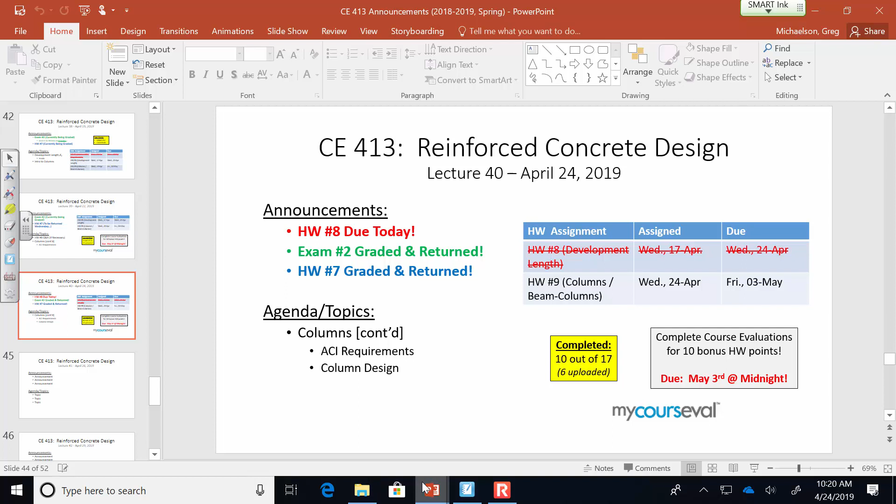Last time we were looking at this particular example. We looked at it, and I don't think the core component was all that difficult: 0.85 Fc prime times the area of the concrete, Fy times the area of the steel, and throw two adjustment factors on there—one's our phi value, and one's the alpha for accidental eccentricity. What was a bit nitpicky about that problem was the details, the little ACI checks we have to do, but in the end I don't think it was terribly difficult, just time consuming. That was for a square or tied column.

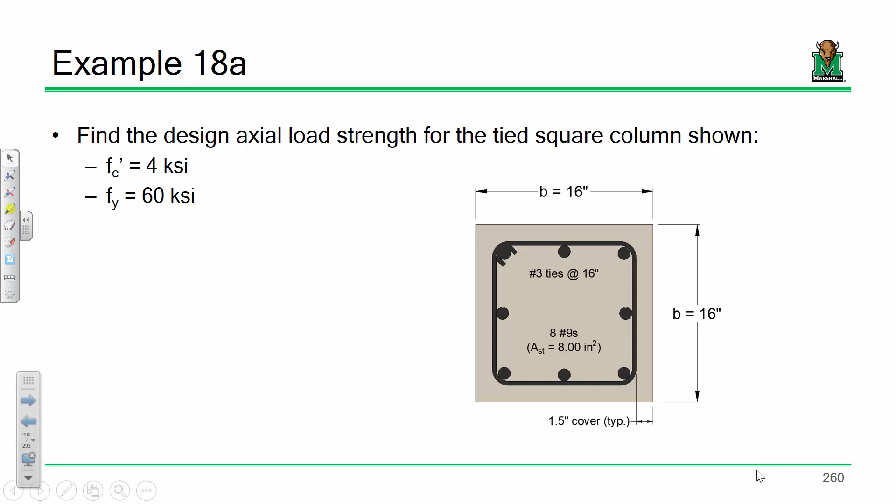Now let's look at spirally reinforced columns. We defined these limits pretty rigorously last time, and I want to review them to make sure everybody remembers. A spirally reinforced column behaves differently because those spirals act like a pressure vessel containing the core of the column. Once you load the column, the exterior concrete falls off, but inside, that spiral reinforcement holds everything together and confines it, so you can eke out a bit more improved behavior from the column.

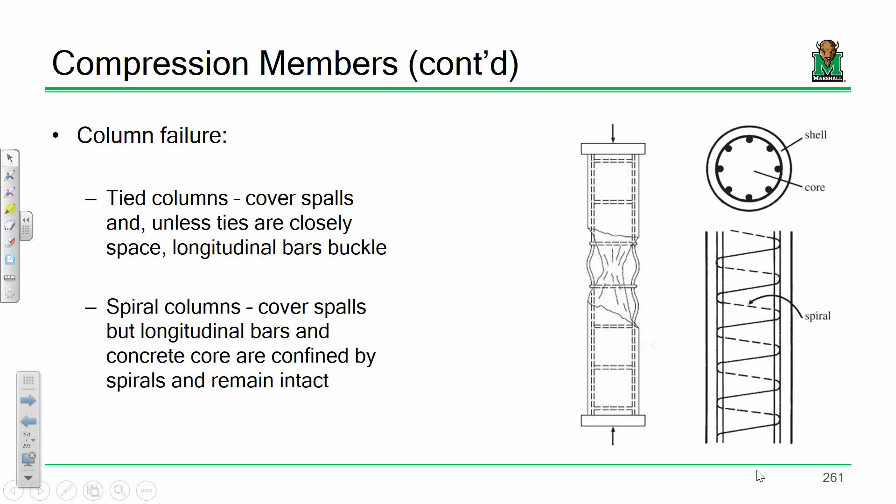Now, in order to do that, you've got to provide a lot of spiral reinforcement, because you're trying to ensure that the spiral reinforcement can hold up 0.85 FC prime times the area of that core.

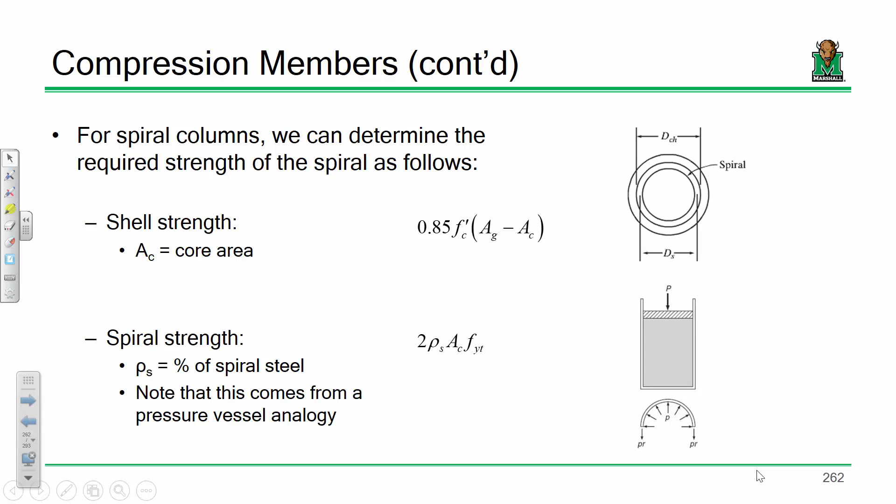That reinforcement needs to meet the required ratio, assuming this acts as a pressure vessel. So we solve for that theoretically, and we get a value that's 0.425 times the limit of those two expressions. What ACI says is, let's just round it up a little bit to 0.45 times those quantities.

Again, really straightforward stuff. Now, that box, keep in mind, that's the limit. That's the minimum amount of spiral reinforcement that we have to provide. This is how much we actually are providing.

So remember, a reinforcement ratio is just the volume of the spiral divided by the volume of the concrete. We're used to doing area of steel divided by area of concrete, but it's a little 3D here because we're talking about the steel going this way.

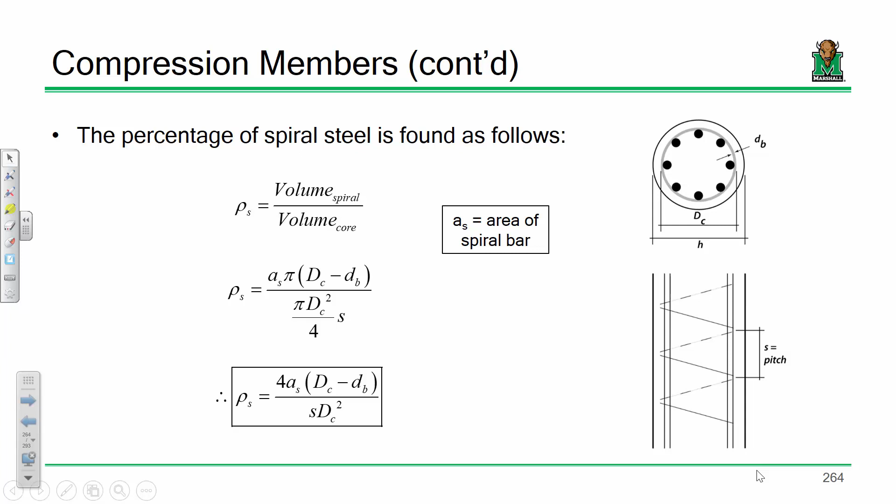It's wrapping around the column and going up, kind of like a big spring. So we take the volume of the steel as just the area of the bar times a single revolution, and then the volume of that concrete as pi d squared over 4 times the height as that rebar goes up one pitch. Just divide the two and do a little algebra to simplify it, and that's the amount of steel we're actually providing.

So that's how much we're providing. That needs to be greater than or equal to our ACI limit, and then you're good.

Sound good? All right, let's go through a pretty straightforward basic example on the analysis of a circular column. So I have a column that's 4 KSI concrete, 60 KSI steel. We have, I believe, 7 bars that are spaced equally around the column.

That's another thing about circular columns, is that you can use like 7 bars and it's not that big of a deal. On a square column, it'd be kind of weird to use 7 bars. You probably want to keep it symmetric and even, but that's no big deal for a circular column.

So we have 1.5 inch cover. It's a 15-inch diameter column. We have a number 3 spiral going up the column pitched at 2 inches. Now we're going to determine the design axial load strength for the column, and we're also going to determine whether or not we have enough spiral reinforcement. So this will be a pretty good example.

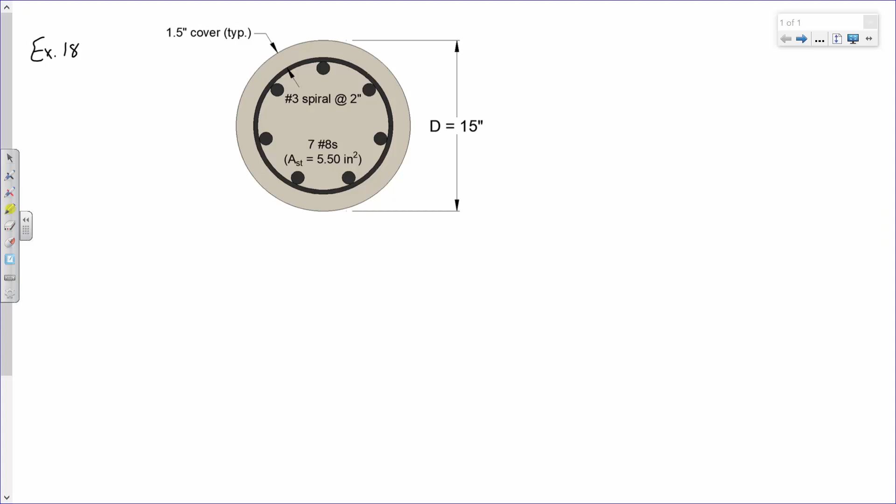So here's our column. Okay, so we know it's 4 KSI concrete and 60 KSI steel. I guess I should be a little neater about that.

Okay, now we have a 15-inch column. The first thing I'm going to determine is what's D sub C. D sub C is the diameter of the core, and what we do in concrete design is take that calculation pretty easily. We take the diameter and just subtract off the cover. So if I have the diameter and I subtract one cover this way and one cover this way, what's that going to leave me with?

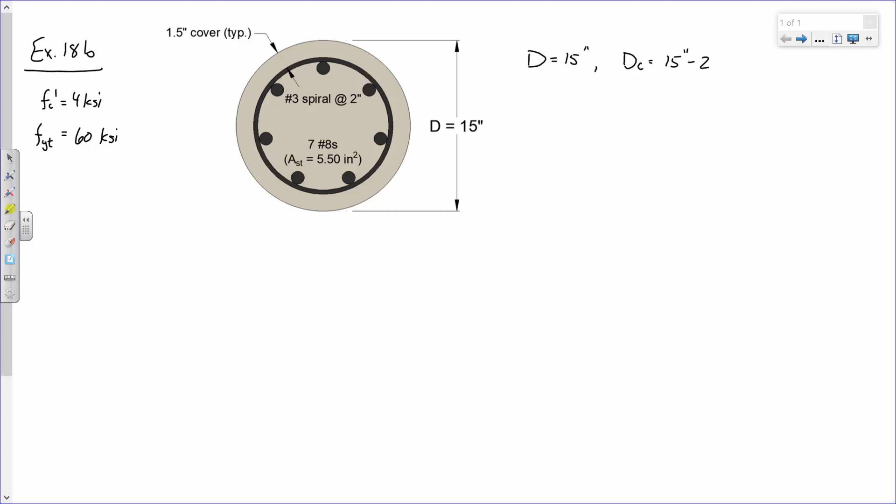12 inches, there you go. So 15 minus 2 times 1.5 inches, which is 12 inches.

The reason why we need the core diameter is because we're going to need not only the gross area of the column, but we're going to need the area of the core as well.

So the gross area of the column is going to be pi d squared over 4, or if you want to use pi r squared, you're more than welcome to. You can divide by 2 and then use pi r squared, or just do this—I think it's a little easier. So pi over 4 times 15 inches squared.

And then we're going to need the area of the core. That's going to be pi dc squared over 4, so pi over 4 times 12 inches squared. That should be pretty easy. The gross area is 176.7. And somebody else, what's the area of the core?

So, 113.1. Sound good? Now there's two other things we're going to need.

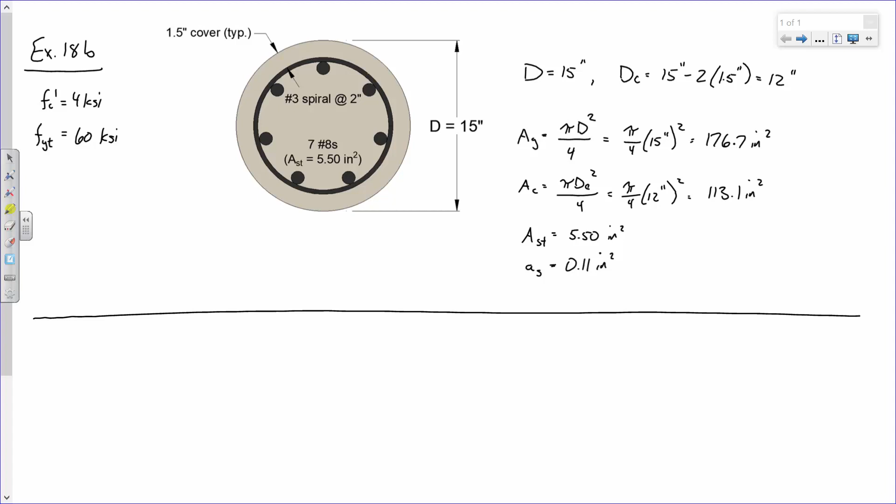So the design capacity is really easy. Monitor's not liking me. So, first off, what's our formula? Well, it's phi times alpha times a big quantity.

And that quantity is 0.85 FC prime times the area of the concrete, plus Fy times the area of the steel. That's easy, okay? And so we can plug and chug, except we're missing a couple values. What are we missing? Phi and alpha.

What are phi and alpha going to be for this column? 0.75 and 0.85. They're always going to be higher than for tied columns because spirally reinforced columns serve to confine the core of that column a bit better, so that's going to result in improved behavior under those conditions where it's close to failure. So we'll say phi 0.75, alpha is 0.85.

And the answer why, because it's spirally reinforced. So that's 0.75, 0.85.

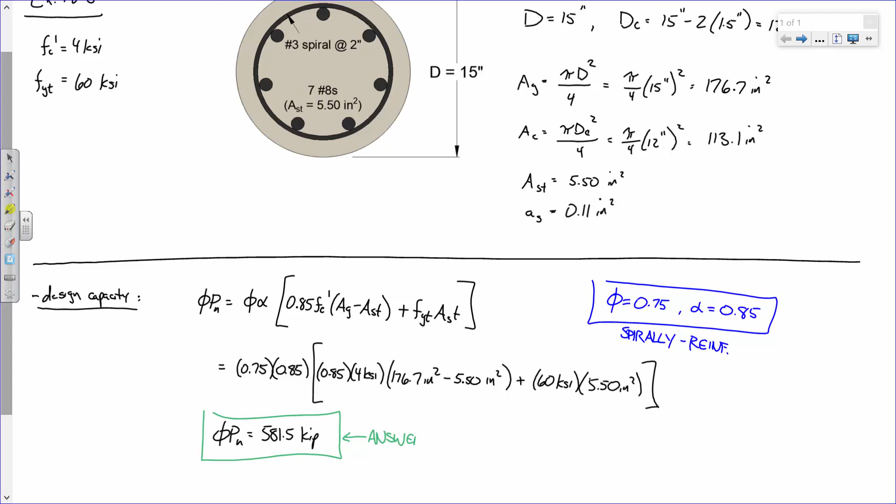Sound good? Did you get yours?

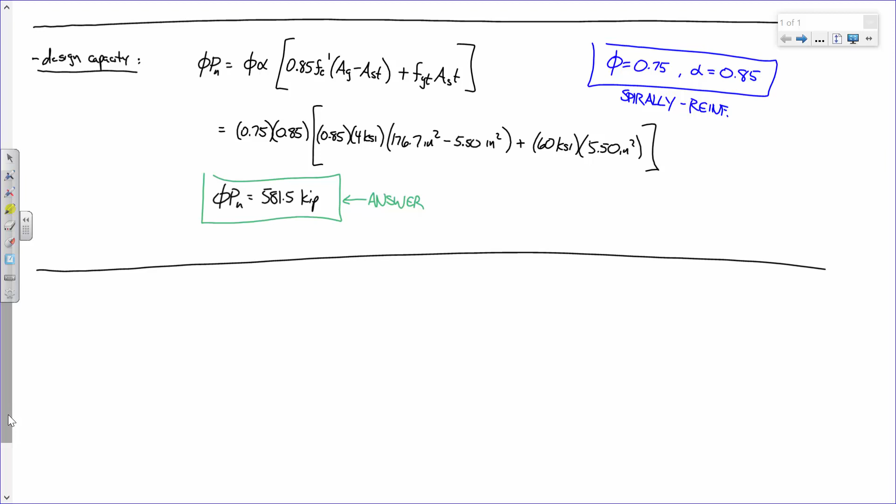No, take your time, this is important. I'm so sorry, no. You're doing the calcs, I want to take the time to make sure it's right. You might be getting it right, they might be getting it wrong, I'm going to be getting it wrong.

You got it? Okay, it's easy to throw parentheses in the wrong spot here, which is why, look, again, I know exams can seem like time crunches. I always recommend that you do a calculation once, then immediately do it again, just see if you get the right answer. I mean, I don't know about doing 2 times 12, I think I could probably do that in my head. But something like this, do it, and then just do it again, so just like completely fresh. So it will reduce errors overall.

Okay, next, we're going to do the spiral steel check. And what I'm going to do for that spiral steel check is this: I'm going to use a little bit of a different notation than what's in the slide, but I'm doing that to just make sure you're crystal clear as to what we're calculating and why we're calculating it. So the first thing I'm going to calculate is the actual rho S.

And what I mean by the actual rho S is this is how much steel is actually in the column, okay? So when I compute 4 times AS, DC minus DS over S, DC squared, I want it to be clear that that's a measure of how much steel is in the column, okay?

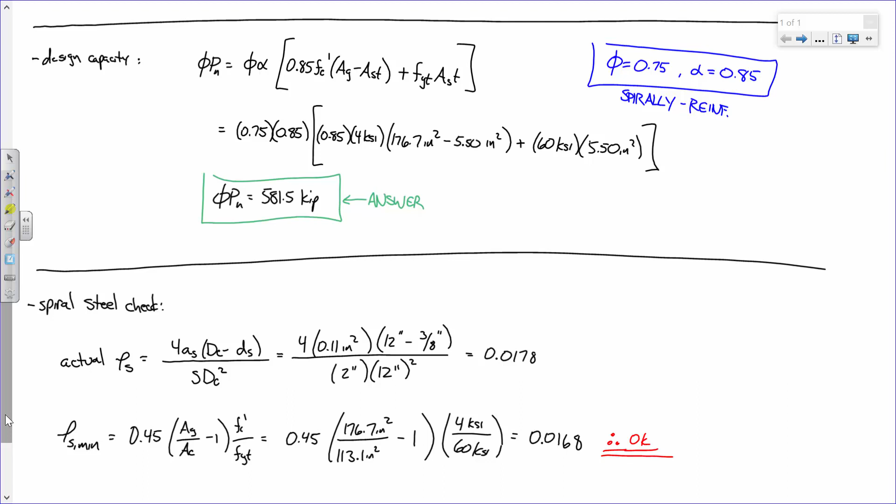Well, that's what reinforced concrete design is all about. Fortunately, I'd argue of all the designs that we do, not just in this course but in design overall, design of a reinforced concrete column, neglecting the effects of buckling, is by and large the easiest thing you'll ever do. Column design is pretty straightforward.

So all you do is this: you determine your load on the column, your factored load, axial load, whatever. Then what you need to do is guess a reinforcement ratio, okay? Typically, first off, your reinforcement ratio has to be between 0.01 and 0.08 - that's just required by ACI. A good starting value is 0.02, okay? Typically we want columns to use a little bit of a smaller amount of reinforcement, so I'm estimating a value that's a little on the lower end, but not too low that I'm going to have to go back and iterate this thing like crazy.

Once we do that, what we do is we solve for a required gross area, then we use that gross area to determine the amount of reinforcement. Now these two steps here, if there's anything that's a little confusing, it's these two steps, okay? So let me sort of illustrate that.

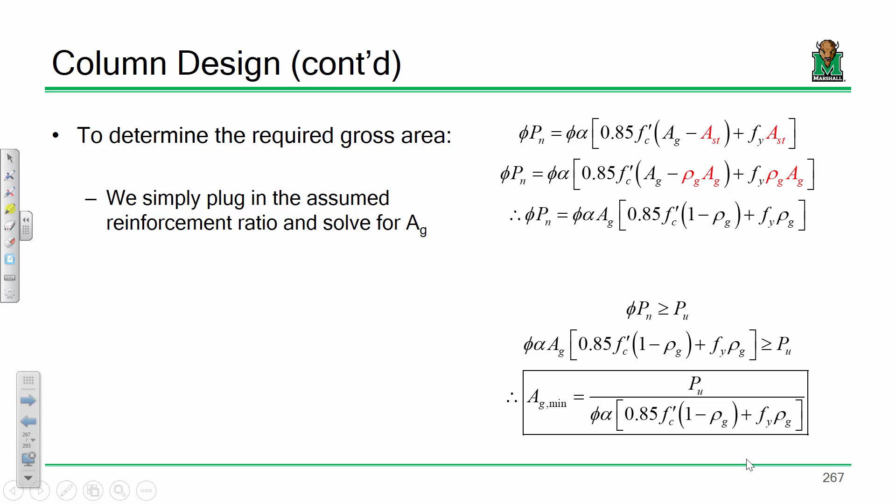You're like, wait a minute, you round it down, you can't do that. Yes, I can. I'll explain why next time. But if you want a spoiler alert, the reason why is because to determine the required amount of steel, I'm not going to take rho times this. I'm going to take my actual column area and then solve for how much steel I need. And so we'll go into that next time.

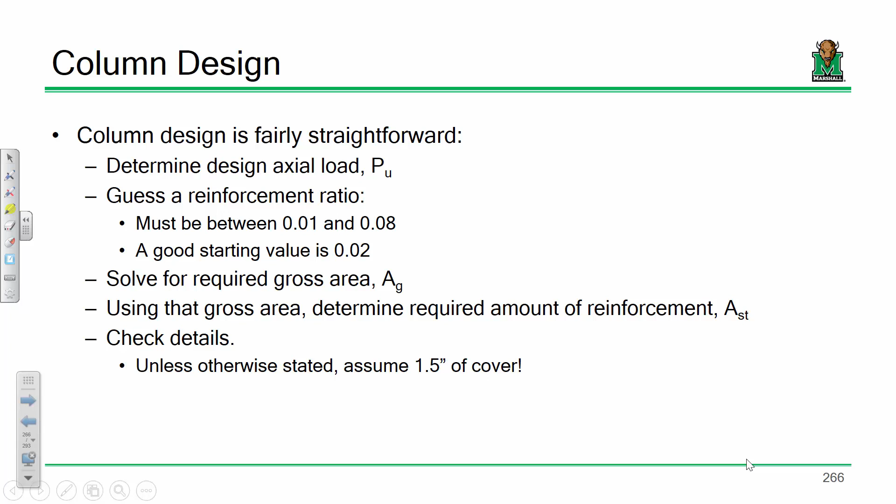So that's all I got. Yeah, once we figure out how much steel we need, is that how we determine the slope of the spiral? Like if we have, say, a 20 column, how do we... No, there's another process to that. It's not hard, but there's a little more to that. We're going to do that in 19B.